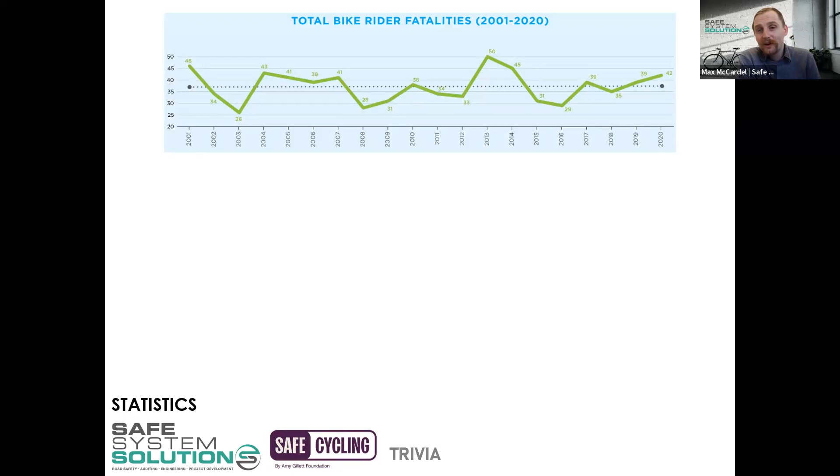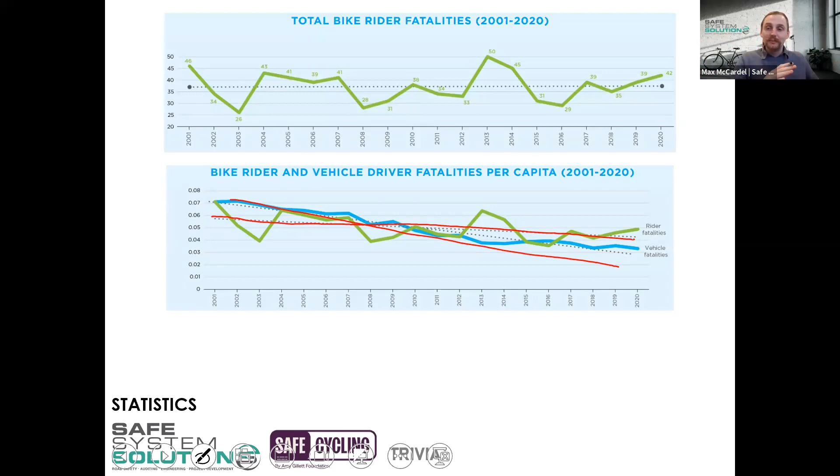If we compare that to vehicle fatalities, the trauma occurring there has been reducing over the years. The second graph is fatalities per capita, taking into account not just the number of deaths but how that relates to the population, or per head. Vehicle fatalities is that blue line, and we can see a downward gradient there. Cyclist fatalities also has a downward gradient, but it's not quite as steep. That's indicative that we're seeing wonderful improvements in road safety performance relating to general traffic or vehicles, but our cycling population is not seeing that same level of benefit. There still seems to be an issue with cyclists being killed on the road network, and it doesn't seem to be decreasing at the same rate as we're seeing with general traffic.

Now, when we look at the actual gender split for that, unsurprisingly it is men being the bulk of those killed on the network. I'd say unsurprisingly in that men are generally more commonly riding, and also more commonly riding in those higher risk environments, which could be higher speed roads or busy interchanges and things like that. So that's just a little takeaway there as well.

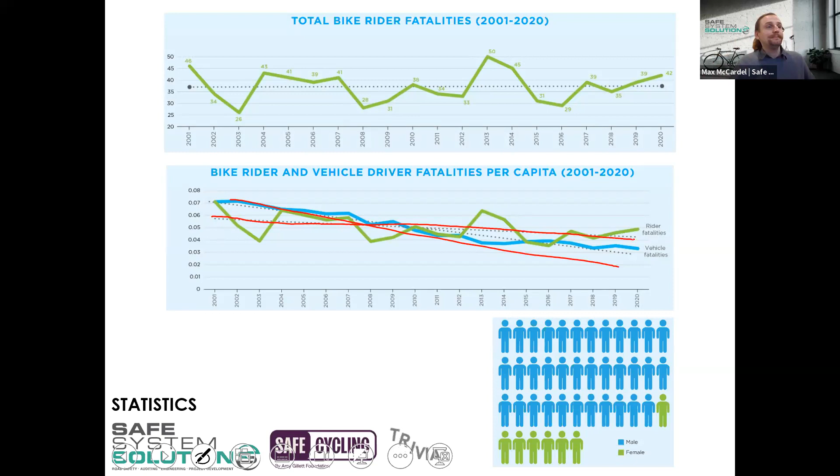Today's module topic will be all about roundabouts. Now, we could have included roundabouts within the intersection module because a roundabout is an intersection configuration, but it's deliberately been separated here because they are generally quite a significant pain point for cyclists. It's another one of those areas where traditionally we've done very poor work in designing for safe cycling facilities within or adjacent to roundabouts.

There's definitely a strong case for roundabouts' ability to improve safety for general traffic. For those in vehicles, roundabouts are a wonderful thing, they have excellent safety features. It's the way you've configured the roundabout with the angles - if you were to crash within the roundabout, they tend to be more of that angle where you've got an ability to glance or collide with each other rather than a perpendicular or T-bone type of crash. So that's for general traffic. However, those same benefits are not echoed for vulnerable road users, pedestrians and cyclists. In fact, cyclists and pedestrians tend to fare worse at roundabouts compared to a signalized intersection. So just something to keep in mind there - that's why we focus so much on it in today's module.

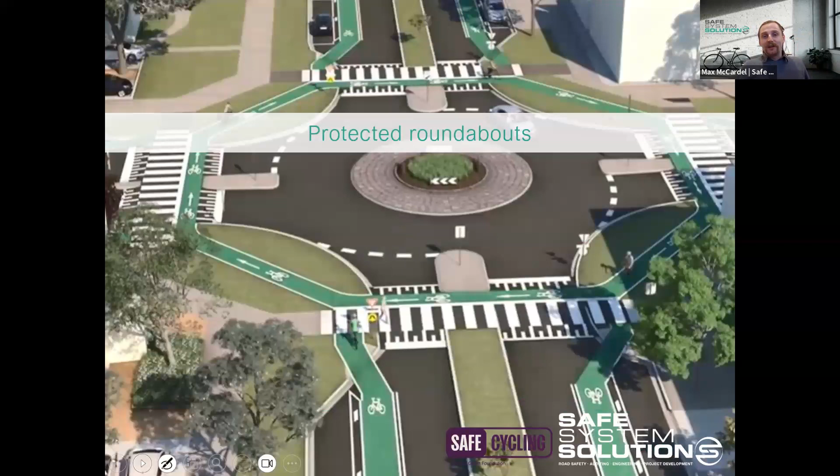So a protected roundabout, this is an artistic rendition of Melbourne's protected roundabout. It looks something like this. There are a few different configurations, which we'll go through with our international examples, but the main thing you want to achieve within protected roundabouts is a cyclist having the ability to use an off-road or protected feature away from the circulating area.

This inside ring is where general traffic obviously travels. Cyclists are not being encouraged to use that. Instead, they are directed to use an off-road or protected facility that runs adjacent to that inner ring.

Now, this leads in very well to our next slide, where we've got three cyclists within a roundabout here: cyclist A, cyclist B, and cyclist C. We're going to launch a poll now, which will ask which cyclist you believe is most at risk. So you've got cyclist A, B, or C. I'll give you 30 seconds to have a go at answering that poll.

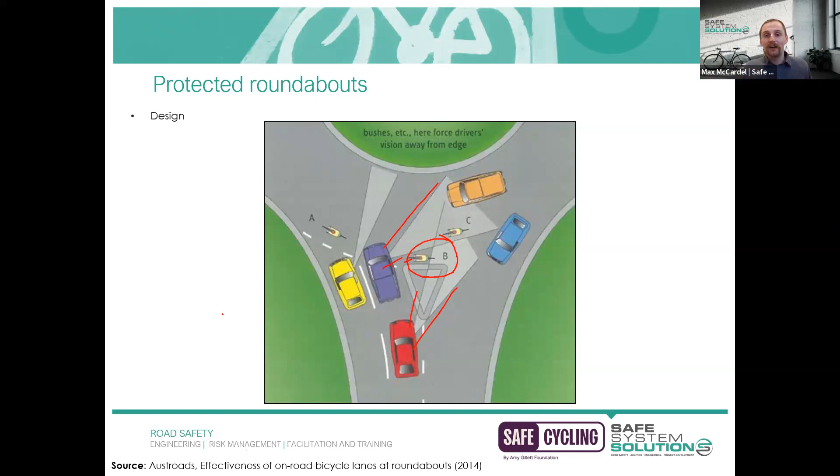Cyclist B is in a really precarious scenario here. The lines we're seeing are the driver's sight lines, or where they're focused. You can see the red car as well as that purple car. Cyclist B is just not within that zone of priority for the motorist, who is really looking out for the big metal cage with the engine. That's just how we've been trained to look for things. There's lots of psychology supporting that we're just trained to look for cars, not really for cyclists or even motorcyclists. Being in that position, cyclist B is definitely in quite a grave scenario, because it looks like the purple vehicle has already started to enter the roundabout, so there is going to perhaps be a collision there.

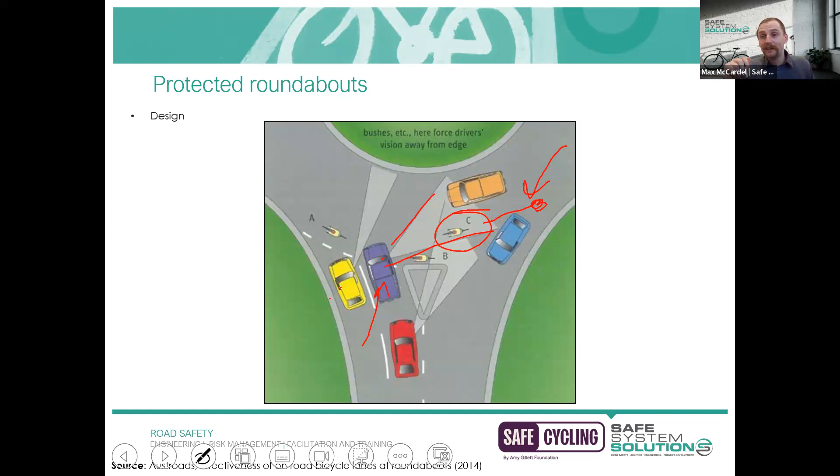Cyclist C, there are a few reasons why this area is of concern. When cyclist C was back at this point, the exiting vehicle would have resulted in a collision there. Similarly, the purple vehicle is able to see C, but the yellow vehicle cannot see C because of that. The term I used on Wednesday is dynamic visual obstruction, or masking — basically the purple vehicle blocks the sight lines for the yellow vehicle. So the purple vehicle may, at the last minute, slam on the brakes and stop to let the cyclist pass, but the yellow vehicle may not, and enters the roundabout, resulting in another collision there.

So I do think the answer is that all of those result in quite significant risk for cyclists, and this ties in nicely with our next slide, which is where we're seeing trauma occurring for cyclists at roundabouts.

So this was done a few years ago now, nearly 10 years ago, but Austroads commissioned this study into all the different crashes that have occurred within roundabouts, reviewing the police reports to determine exactly what were the movements of both the cyclists and the vehicle.

Overwhelmingly, at 68%, it's a vehicle entering the roundabout versus a cyclist that is already in the roundabout. The green dotted line is the cyclist, and the red solid line is the vehicle. This is the classic example of looking but failing to see, or looking just for cars, seeing a gap in the cars and not noticing or processing that there could be a cyclist there as well. So 68% of crashes are that type, with a vehicle failing to give way and entering the roundabout where there's already a cyclist there.

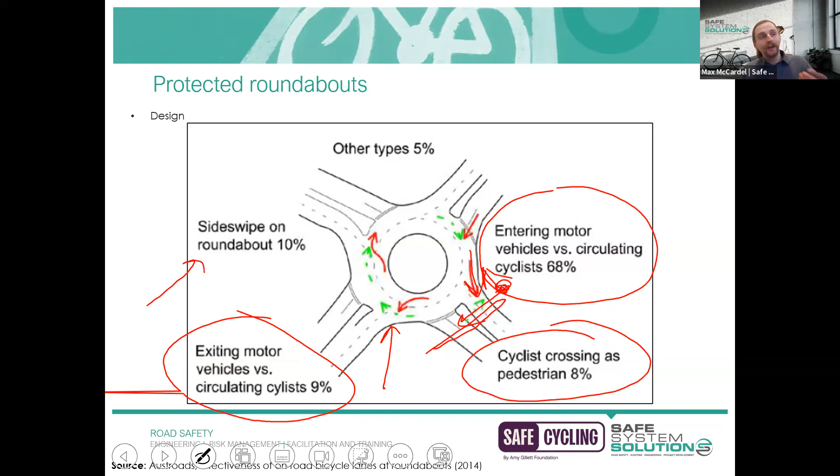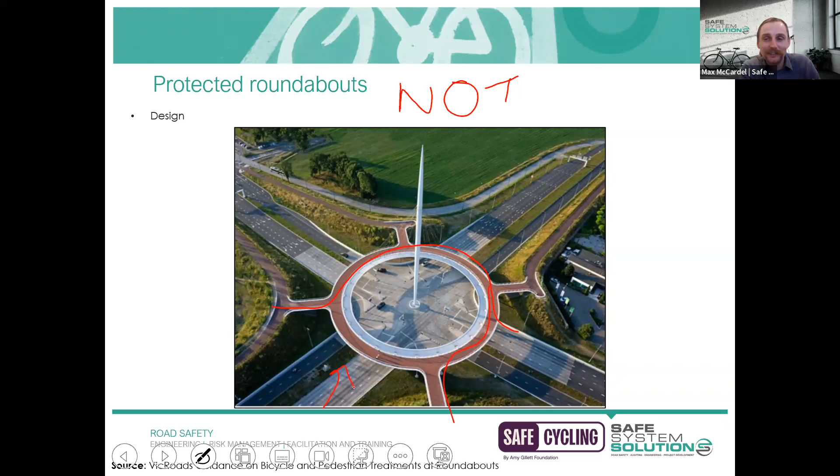Now we will talk about protected roundabouts in today's discussion. This is not an example of a protected roundabout - some people think this is what protected means, but this is a wonderful example of grade separation. This is the Hovenring in the Netherlands, and as you can see it basically completely separates cyclists and pedestrians from the busy motorway below, so they don't have to deal with any of that traffic - they've got their own separate facility. If you've got the ability to do this, by all means do it, but a protected roundabout looks a little bit different. I just wanted to show the Hovenring because I think it's really cool.

So similar to our intersections, we will talk about the design configurations. Once again this has been adopted from a North American research authority, so different terminology, and it's also been flipped just for this training session. But as I mentioned, what we want to be doing is providing our cyclist facilities away from the circulating area. We don't want to be recommending that cyclists use the same travel path as motorists, because as we just discussed with those crash types, motorists may fail to give way to cyclists in there.

Motorists may exit their leg and then conflict with a cyclist in the roundabout. Motorists may veer from their traffic lane, resulting in a collision with cyclists. So if we can avoid that situation altogether and provide off-road or protected cyclist facilities away from that circulating area, we'll see the safety benefits associated with that.

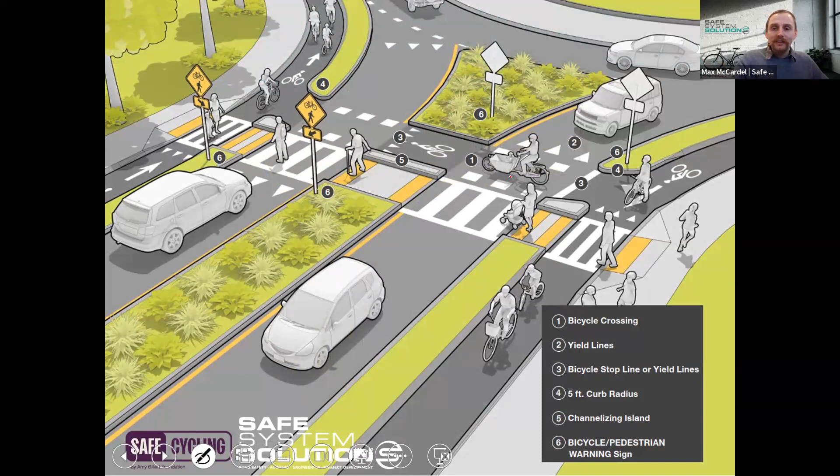Now I'll go to the next one because it's got all the design features, a bit easier to talk to. Number one here is the bicycle crossing point, where the cyclists are crossing over. So you can see there's a bicycle lane there.

Number two is the yield lines, so we would call that give way line marking or something like that. Basically, the locations where it is clear for motorists that they have to slow down and give way to pedestrians and cyclists crossing within that space - they are not awarded priority.

Now this is a very confusing part of this diagram, which says bicycle stop line or yield lines. I'm just going to cross that out because you wouldn't have both the cyclist and the motorist yielding - you would pick one or the other. So generally we recommend making the motorist slow down, give way to our vulnerable road users, and don't worry about number 3 at all because it's just overly confusing. I'd say that's not for our jurisdictions. Over in North America they do that, and also in Europe, where you've got the yield lines for both - I think it's very strange.

Number 4, once again not a significant issue, is just the curb radius - ensuring that things aren't too tight for cyclists to turn and interrupting their journey.

Number 5, I wouldn't say is a critical feature either, but it's suggesting that you've got something that separates the pedestrian facility from the cycling facility - channelizing islands or a curb system or something like that. I think it offers some degree of delineation, but it could also present a tripping hazard for pedestrians crossing there, or errant cyclists as well. So I don't see that as a critical feature.

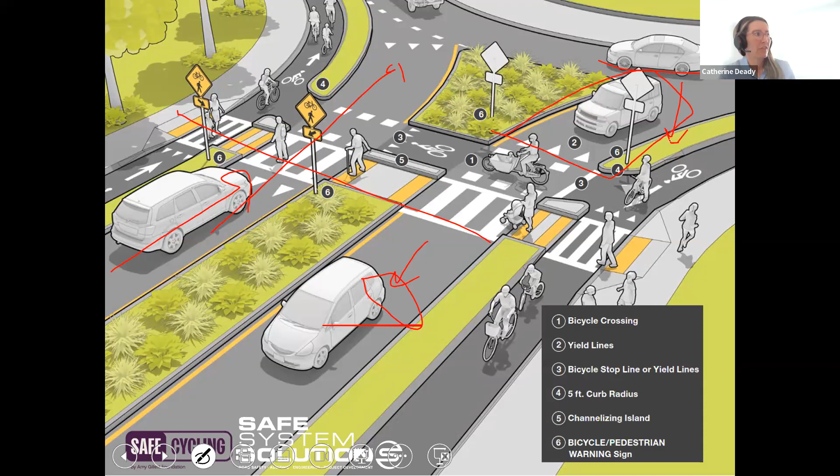Thank you, just one more question. If the distance from the roundabout to the bike pedestrian crossing point is small, what if an exiting car suddenly has to stop and cars following suddenly stop, blocking the circulating roundabout? Wouldn't there be increased risk of rear end collisions?

Yes, that could happen, and you may have an increase in rear end or sideswipe type crashes within the roundabout. But it's a much better outcome because people generally walk away from those types of collisions. It's an annoying thing, and it goes to insurance companies and mechanics, but generally those rear end sideswipe crashes are completely survivable.

If we compare that to the other option of getting cyclists riding within the circulating area, because that's deemed too much of an annoyance, a collision between a cyclist and a vehicle in the circulating area - 90% of the time that is going to be a serious injury resulting in hospitalization or fatality. So looking at the severity of the different crash outcomes, I'd still go for this as the preferred design.

Thanks, that's all from me, Max. Thank you. Max, what about trucks and buses?

This first example is where we actually have quite reasonable land availability. This is in Assen, in the Netherlands, and I have flipped this image as well.

A vehicle within this space, say turning right, traveling from here - that's their movement. A cyclist who wanted to turn right has a couple of options: they can go from the same direction like this, and since it's also a bi-directional facility, they could also go like this. All I wanted to show is there's no interaction with cyclists in the circulating area - they've got their own path, completely separated, and don't really conflict within that circulating area at all.

Where cyclists are crossing, they're at distinct locations - crossing the legs where I'm circling. At all of those locations, they have the right of way, so vehicles are slowing down and yielding to them, giving them priority.

As you can see, this is quite a large footprint. In this example, there's about two car lengths between the edge of the circulating area and where the crossing point is - so that'd be 12, 15 meters or so, which is a fairly large footprint.

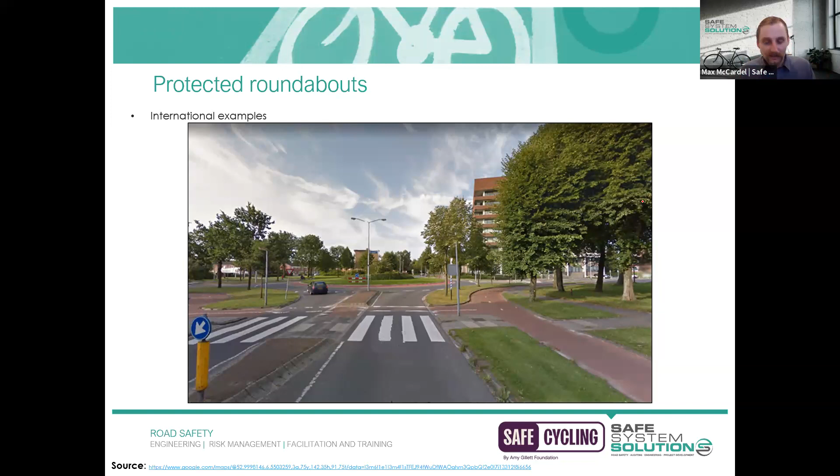I'll also go back to one slide - something else I wanted to quickly mention - if you were a cyclist crossing over this leg here and a vehicle was coming the other way and exiting, once again what I was talking about in the previous module, that conflict point is very, very close to perpendicular, meaning cyclists are crossing in front of that exiting vehicle, which is a very big tick.

In the circulating area, if cyclists were riding here, that conflict angle is incredibly acute, which is really why you're providing these protected facilities - to open up the sight lines, make it as clear as possible where the conflict points are, and ensure that motorists are able to see cyclists crossing there.

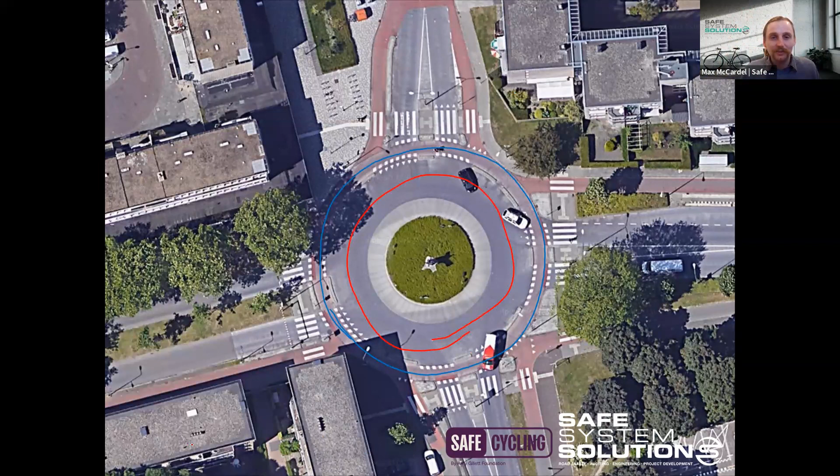This next example is one where we have a much smaller footprint. You can see the circulating area here for motorists, and directly adjacent on the periphery is a nice circular bicycle lane - just two concentric circles being used there. This one is in Rotterdam, still in the Netherlands. This has been designed to work within the existing footprint - you can see the edge of the buildings is very close to the roadway, so obviously land is quite tight in this scenario.

The benefit associated with this is for cyclists traveling - they've got less distance to ride. If they wanted to go left, through, or right, there's less of having to go down 12 meters and then back to the right 12 meters just to go straight. It's a much more reduced kind of connection there.

The disbenefit with this is that conflict angle I was talking about before. Very conveniently in this snap that I happen to have, you can see this white vehicle exiting, and you can see a cyclist riding there as well. If that cyclist was perhaps a bit close or riding at speed, you can appreciate that exiting motorist would have a very hard time seeing that cyclist. We really want to make those conflict points as obvious as possible.

I'll show how that looks from the ground, which once again I have another wonderful cyclist here providing this demonstration. I might bring in a little Porsche driver here just to help with my figure - nothing against Porsche drivers. But if you put yourself in the perspective of that vehicle trying to exit this leg, your ability to see this cyclist as they're coming around and potentially crossing over you is quite limited.

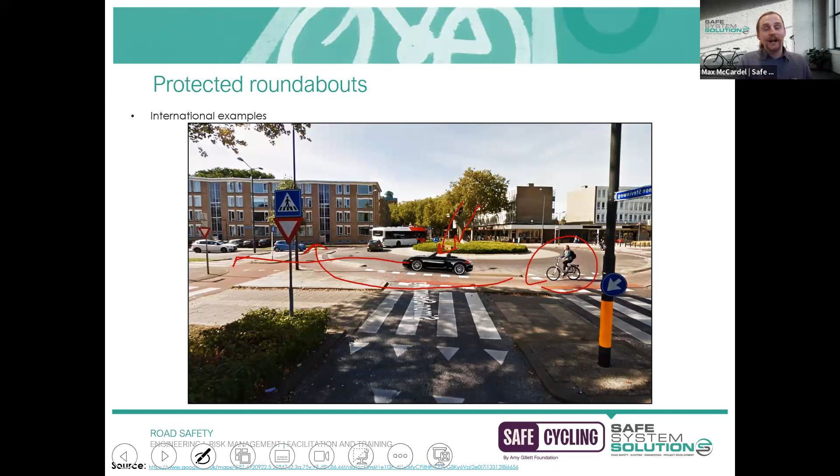Similarly, if you were the cyclist, you may not necessarily have good sight lines of what their turning movement is going to be - you may not see whether their blinker is on, which can create confusion. Now, I'm not saying you always have to have the big footprint to do protected roundabouts, and this isn't terrible - I'm just saying it's a bit of a spectrum with protected roundabouts. The closer you bring the bicycle crossing facility to the circulating area, the more that this sightline risk becomes apparent. So just something to be mindful of.

Another international example, this one is in Cambridge in the United Kingdom on Fendon Road, for anyone interested. It opened in July 2020. It's kind of an amalgamation between the first example we looked at and the second one, where we've got a little bit more space to play with.

This is, I guess, what you would call the yardstick, or what you'd be aiming for within designs. It's basically enough room for an exiting vehicle to be able to stop, yield, and give way without blocking the circulating area.

The sight lines for this one are improved compared to the last one. Not as good as that perfectly perpendicular one that we saw in the first example, but they are improved there. The other thing that is quite good is, once again, having just this one smooth curve radius for cyclists. Cyclists tend to prefer that, as opposed to having parts that connect at weird angles - it's just more comfortable to ride with one nice smooth radius there.

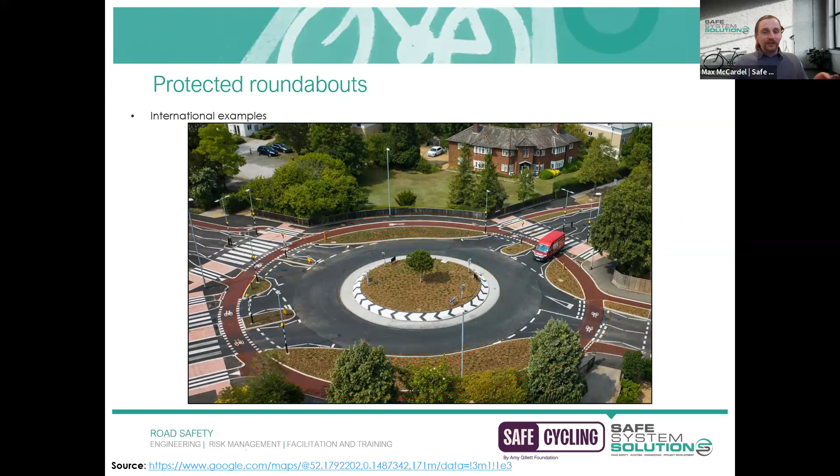Hopefully that gives you a bit of appreciation of the different ways that these protected roundabouts can look. Let's have a look at this one on the ground here. This illustrates the point I've been talking about, where you can see that the motorist has quite excellent sight lines of the cyclists crossing in front of them. In the other scenario, the cyclist would have been right up against them, which is a bit more of a precarious situation.

I'm going to just play a video now of a real protected roundabout that has been installed, which will show you the operation of things. Whilst this is playing, I will check in with my colleagues to see if there's any questions.

Nothing from me, Max. Hello. There was a very good observation from an earlier example that you had, Max, where there was zebra markings on all legs apart from one leg of the roundabout.

Really? Do you know why that may be? I can't say, I'm intrigued. I didn't even notice that. I know, it was a fantastic observation. Yeah, that's a great point. Let's give a prize out there for that wonderful vision. I'll go back to that video - I swear, this leg does not have the zebra crossing.

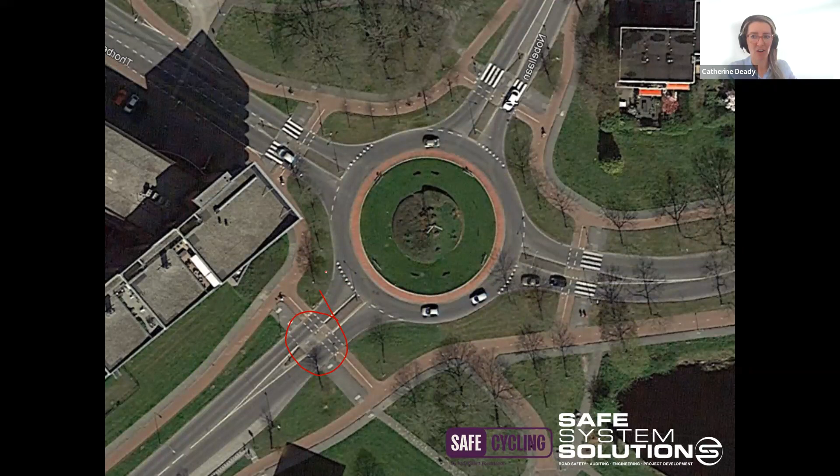My assumption was maybe it's because the authority doesn't want pedestrians to cross at that location, or for it to be a priority for pedestrians for some reason. I'm not sure, but if the person that noticed it is anonymous, please send us a private message so you can get your prize. How peculiar, I can't believe I've never noticed that as well. That's excellent, well done. I'll go back to that video now, we can keep watching that.

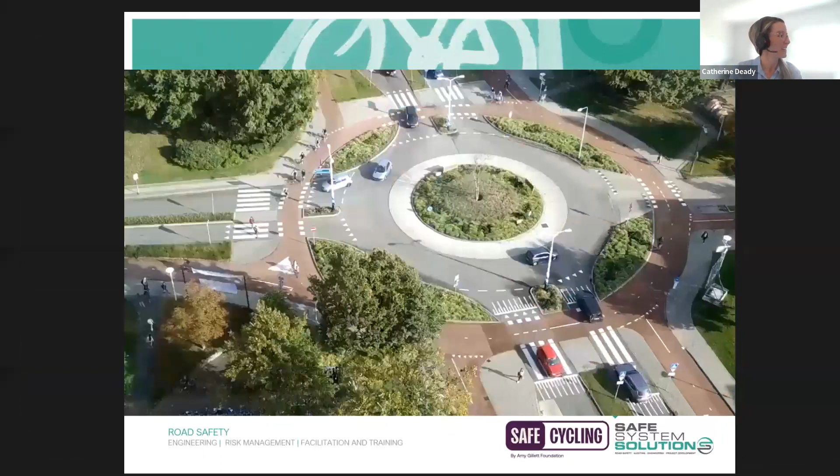Just a question about the examples you've been showing - is it a problem that vehicles stopped to wait for pedestrians to cross are blocking the cycleway? So the way this tends to work in practice, and perhaps this video will show it well, is that actually you might see it.

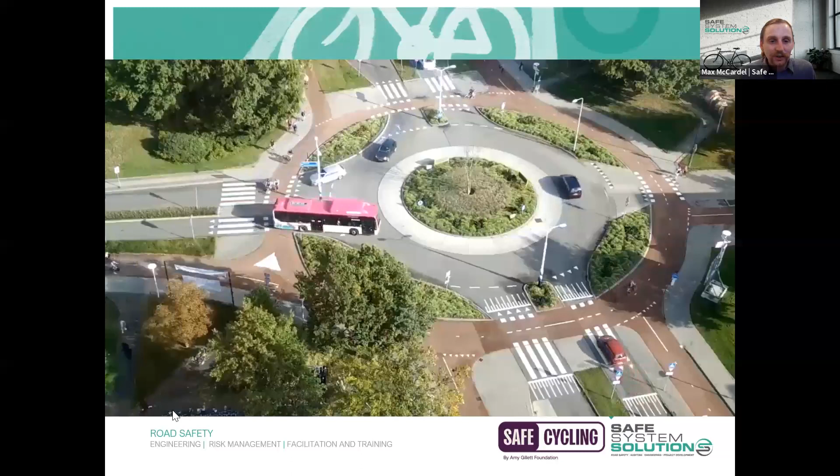Let's see if I can draw it quickly. See the pedestrian crossing - see that motorist was waiting there even while the pedestrians are crossing. So they tend to wait adjacent to the cyclist path and just treat that all as needing to give space, a gap for both cyclists and pedestrians. So the way in practice these things tend to work is it would occur that a motorist would block the cycle lane, but it's not a frequent occurrence, I wouldn't suggest.

It's a fantastic vision, isn't it, seeing it in action. Yeah, and this one is actually peculiar because the bottom leg is raised. You can tell by those piano key line markings - that's a raised crossing point, but the other ones don't look to be. So I'm not sure behind the reasoning for that either.

That's a good pickup. But you can see lots of pedestrians, lots of cyclists riding through here, and general traffic just doing their thing as well. It is a cycling corridor, and that's why this is being prioritized. I think this hopefully gives you a bit of confidence that these things can work. They look a little bit unusual, or we may not be used to seeing this, but generally you can implement these things, and both modes of transport can coexist.

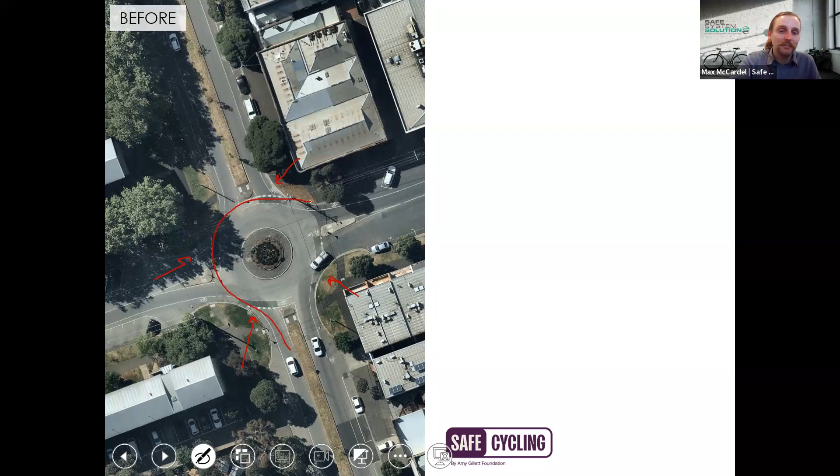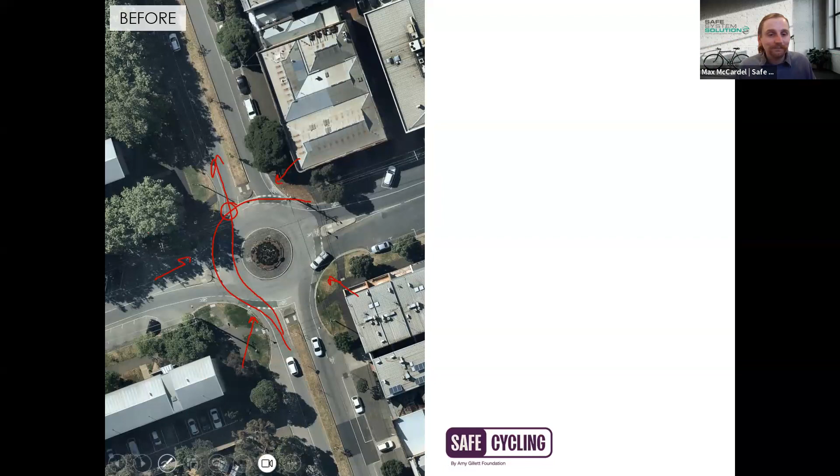This example here is an aerial image of how things used to look. You can see bicycle lanes on the periphery of the roundabout. As I mentioned before, riding on the periphery is incredibly stressful. If you're riding there and turning right while a motorist is behind you wanting to go through, you've got this awkward moment hoping they acknowledge you're turning right. You should be signaling, but you hope they've picked up on that cue. That was the arrangement prior - on-road bicycle lanes within the circulating area, quite an uncomfortable experience for cyclists.

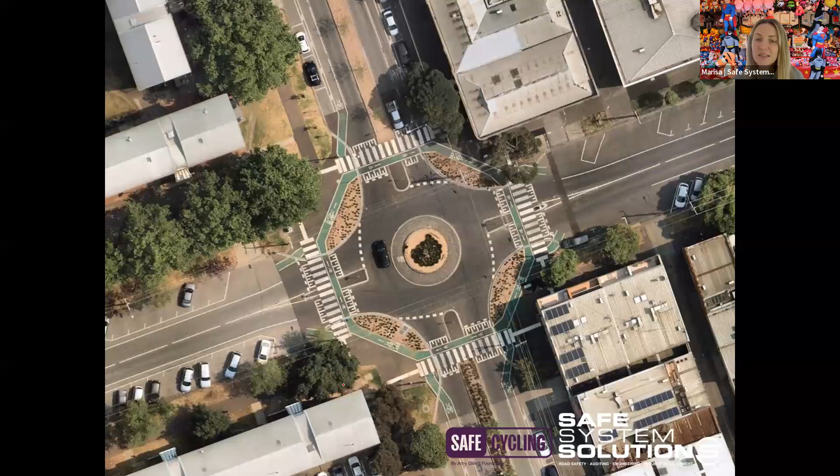Oh, how does it work with the left and right hand side cyclist lane ending suddenly? Poorly, I think it's strange. I think that's referencing these points here, where the cycling facility ends and goes straight into that angled parking we were talking about. Ideally you'd have networks that are completely connected. Even on this side, you can see it's adjacent to a dooring zone with a bit of a painted buffer. On the other side, or it could be another section, there are protected lanes. There's a little bit of everything going on in this corridor, so it's very inconsistent in terms of the different treatments. But I just wanted to focus on this actual intersection or roundabout.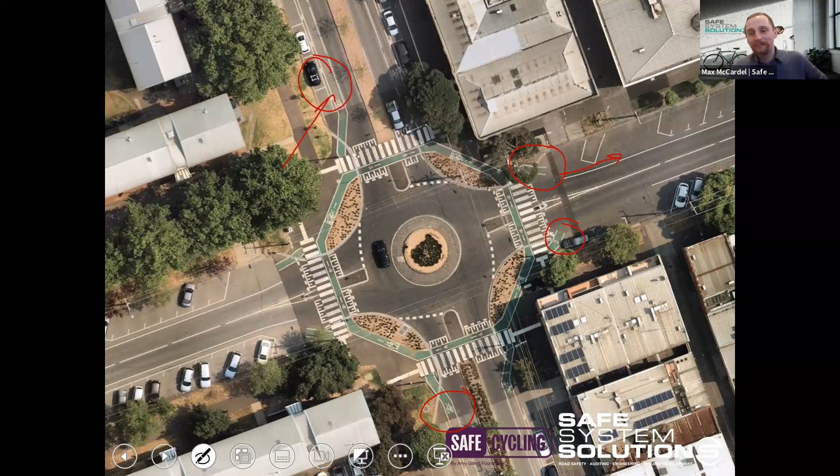Good pickup though. Yeah, really good pickup.

Just a question on analysis - has there been a project evaluation on the protected roundabout here, Max, for all road users? There has been, and in fact we did the evaluation on this, so I can give you some info. We did a study before this got implemented and then post-construction to show how things have changed for all road users. I'll go through some of those figures in the next couple of slides. Great, thanks Max, no worries.

I can see lots of comments going through about the disadvantages for cyclists. Yes, I think at times the raised pavement, particularly where you're tying in with the drainage, can sometimes create issues with debris, or the different ramp grades can be uncomfortable for a cyclist. But the response I was looking for is that cyclists do have to ride further to do their turning movements, in particular the right turn movement.

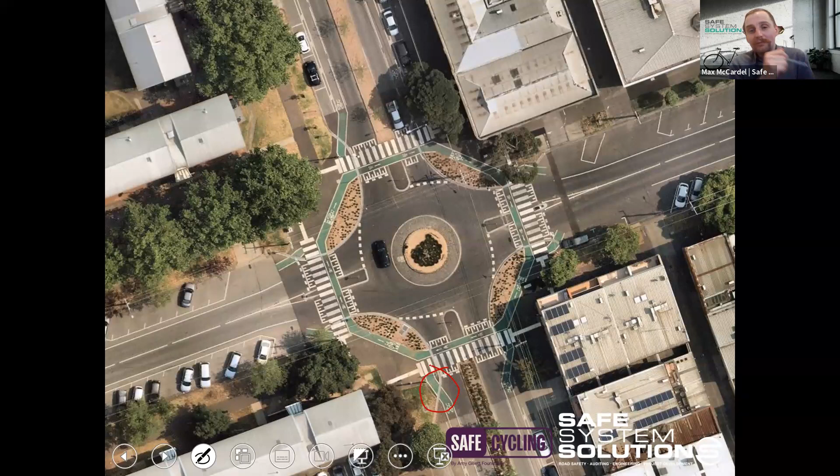If I was looking at a cyclist coming from the bottom using the protected facility, they do have priority at each of these legs, so they don't have to slow down for vehicles and give way, but they do have to travel further than if they were to just use the circulating area. On an aerial, that extra distance seems negligible, but as a cyclist, I know the cycling community will always choose the quickest and most convenient route, which means we do have cyclists using the circulating area, like this person here.

We did an evaluation on how effective the protected roundabout has been for cyclists adopting that protected facility. In terms of cyclists wanting to travel through this roundabout, around 91% are using the protected feature.

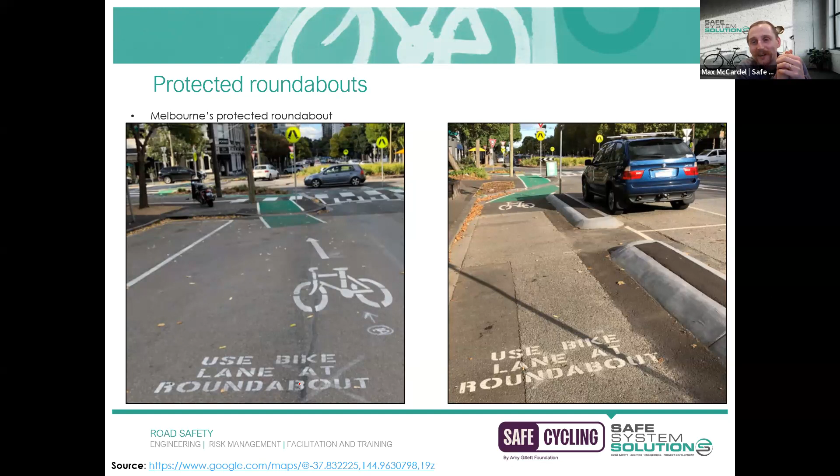Yeah, that's it. That's all from me.

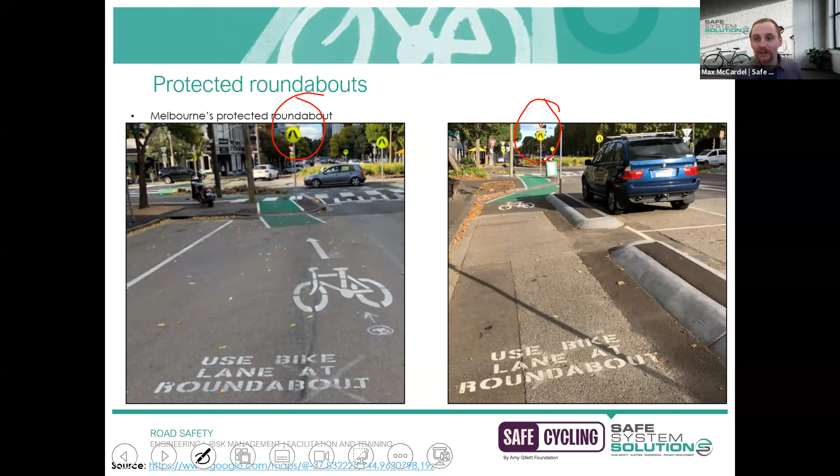Thanks, Max. In terms of the other legality, all of those give way and pedestrian crossing signs are regulatory signs, so they require vehicles to yield. And if they did not, they could be enforced.

We're going to move away now from our protected roundabouts and talk about multi-lane roundabouts. These are significantly risky areas for cyclists. This example shown here is a rural environment, high speed, from memory 80 kilometers per hour. The east-west is a major highway, and the north-south is a lesser local road, a collector road.

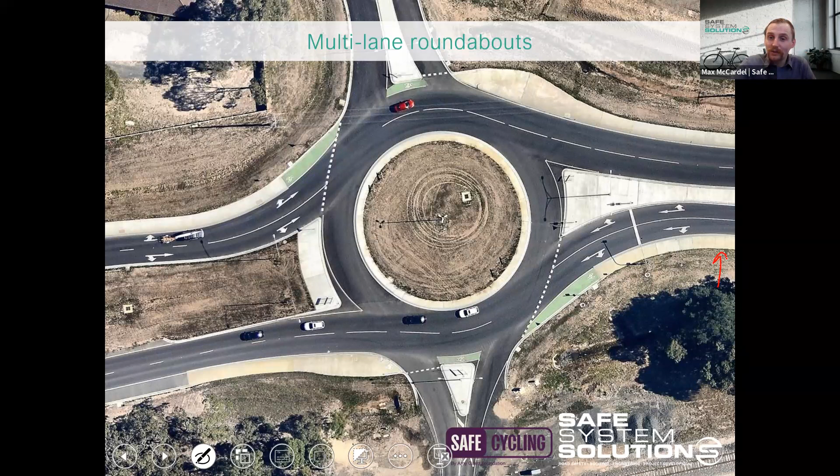On this right leg, you can see things start off quite well. We've got a separated bicycle facility, so cyclists are traveling off the carriageway, which is excellent. As they approach the roundabout, the bicycle lane width tapers, getting narrower, which is very uncomfortable. The reason is to account for swept paths of the through traffic lane, only thinking of general traffic and not the cyclist. A cyclist in this lane has a little green bicycle lane installed adjacent to the splitter island.

If a cyclist was traveling straight, they'd just access that area and continue. However, a cyclist turning right doesn't have many options. They could potentially pause here - there's no curb ramps or anything - and do quite an uncomfortable turn, looking to pick a gap in traffic and filter across to this section, then once again pick a gap and continue. It's not a realistic journey; it's unlikely cyclists would do that. For those who don't feel comfortable, that's an option, but since there's no actual curb ramps, it's pretty unlikely to be a common way cyclists use this.

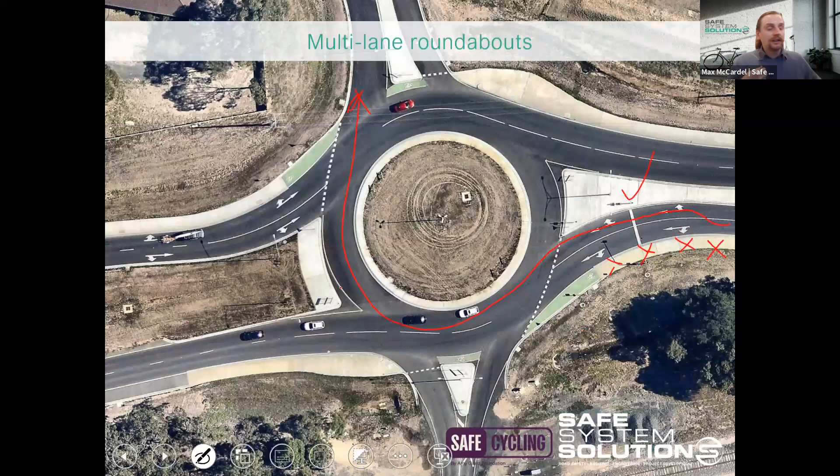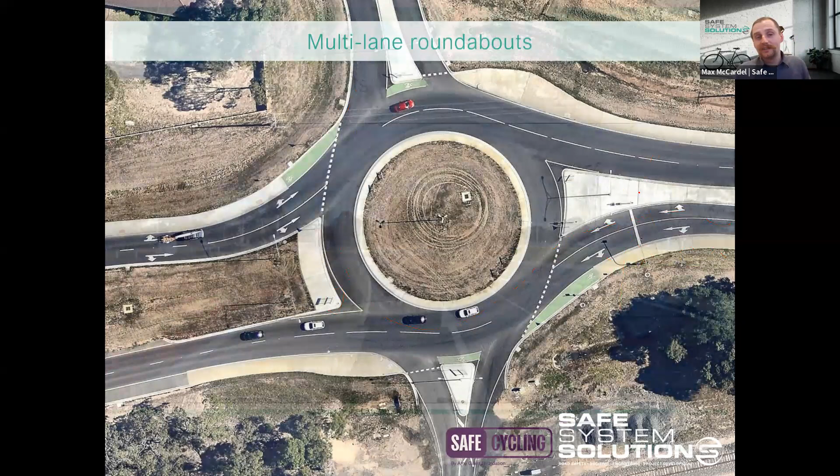You might have noticed this little traffic signal thing, and for those with really good eyes, a hold line or stop bar there. Unfortunately, that's got nothing to do with cyclist facilities at all. That's just there because there's an adjacent rail line, and if the boom gates are down, a red left arrow goes on so motorists don't queue over the circulating area and block that facility. Nothing to do with cyclists, unfortunately.

So these multi-lane roundabouts are significant safety concerns for cyclists, and they ought to be treated as such, as very high risk scenarios for cyclists, particularly if you've got cyclists turning right.

Another example shows a very similar roundabout in terms of configuration. However, the way the cyclist connection has been treated is different, so I wanted to focus on this one. This is in Canberra in the ACT. Just focusing on the right-hand side again, we've got a bicycle facility on road, and they get directed to an off-road facility.

This off-road path moves cyclists away from the circulating area. There's a hold rail, which is those little U rails, where cyclists can prop and wait and give way to any vehicles, pick a gap before crossing over. And if they were to do a right turn, once again there's a hold rail there and curb ramps to help facilitate these types of movements.

100%, this is much more circuitous, or it takes a lot longer for a cyclist to do this kind of movement. But in these scenarios, you've got high volumes of traffic, high speeds, and so you just can't be trying to commingle cyclists within that space. It's not going to work.

In an ideal world, we'd be able to grade separate everything and we wouldn't need to worry about conflict points at all. But we are pragmatic, and instead what we can do is assign the priority to general traffic, because if a motorist sees a give way for pedestrians and cyclists at roundabouts that look like this, they're not giving way. It's incredibly unlikely they'll give way.

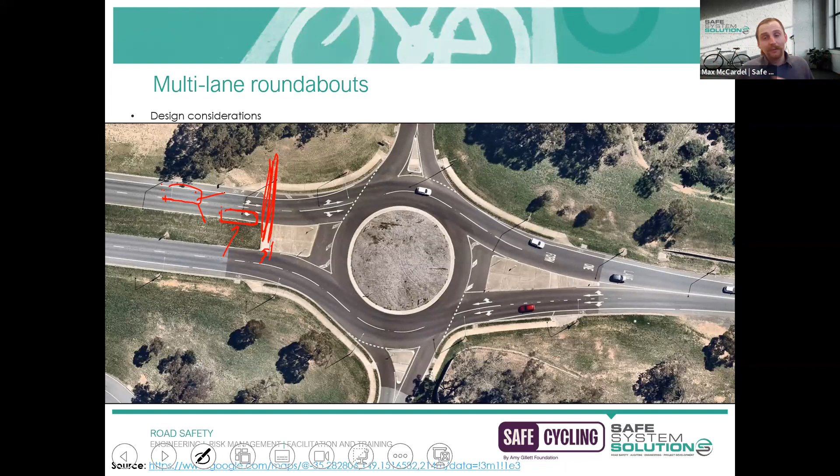Here's how it looks on the ground in wonderful Canberra. As you can see, cyclists are being corralled into that position there. It's not fenced off, so cyclists could still cross over here to get into the right lane and do that movement if that's what they wanted. But it does provide that for those that don't feel comfortable, that there is a crossing point that's provided. You will have to give way. You will have to wait until you've got a gap in traffic and then cross over.

Now, as I said, it'd be wonderful to have all these things as just connected facilities for cyclists, but I am trying to be pragmatic in this space and acknowledge that where you are crossing motorways or high movement function corridors, you're pretty limited to be able to slow down vehicles in those spaces.

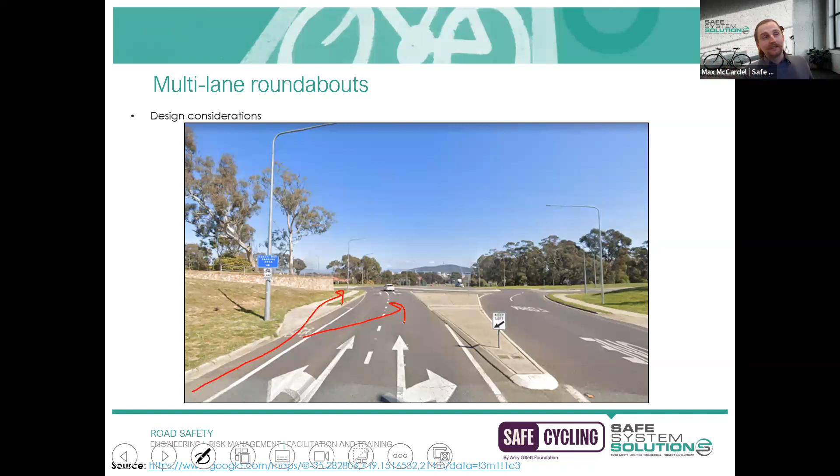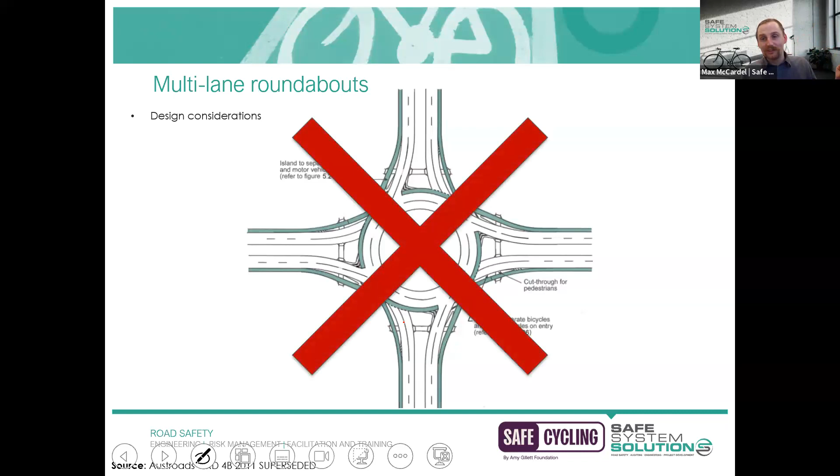Now, the other diagram I wanted to mention with multi-lane roundabouts is this one that was out of the Austroads guide previously. If you've got any printed versions of your Austroads documents, make sure you put a big cross through this one because this has been superseded. We are no longer recommending having bicycle lanes actually demarcated within the circulating area on multi-lane roundabouts.

So you can see this multi-lane roundabout has the bicycle lane right on that periphery. That's no longer being recommended, and that's taken out of guidance altogether. So if you've got any of those documents, make sure you supersede those, and instead what we want to have is cyclists crossing at distinct points and acknowledging that the priority may not be awarded to them.

Speaking of that movement function, I actually quite enjoy this as a concept design, which I do not know this area. This to me is just a bunch of lines on paper, but the way I immediately interpret this is I can see that the east-west leg is multi-lane, so I'm going to assume it's a high movement function. For those that have done any movement and place type of training, this would be like the M1, where it's really important for getting goods and services through here, getting all those transport trucks and things like that. This would be your general traffic corridor. That's just my limited understanding of what I'm looking at here.

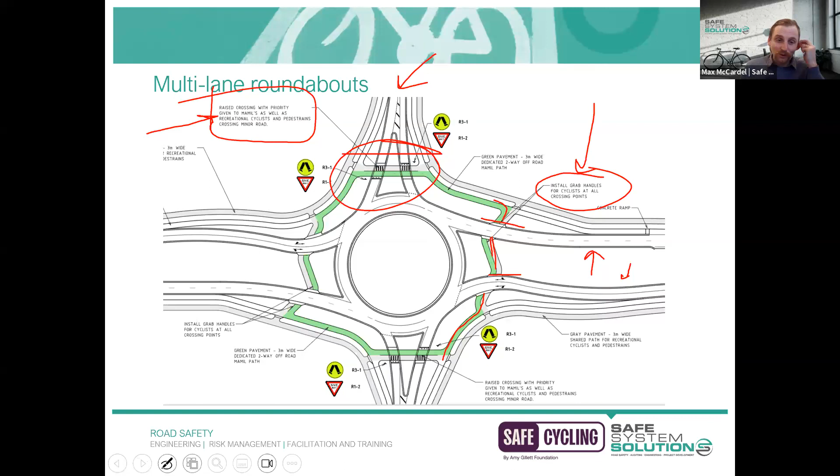I think they're a high risk. As I mentioned before, if you've ever got two lanes adjacent each other, you've got that masking risk. And so invariably you will have a moment in time where it could be possible that pedestrians or cyclists crossing are completely blocked by another vehicle.

In saying that, does that mean you just don't do any facilities and you're not encouraging any activity at all? I don't think that's a good outcome either, because if there's a demand there for pedestrian cycling activity, then presumably there's surrounding land use that is generating that attraction.

Perhaps it's bigger than that, and it goes back to our strategic planning of where we are actually putting things that are important to our community. If it's adjacent a multi-lane roundabout, that's probably not where I'd be prioritizing things like schools or shopping centers, because we don't want lots of pedestrians crossing in these scenarios.

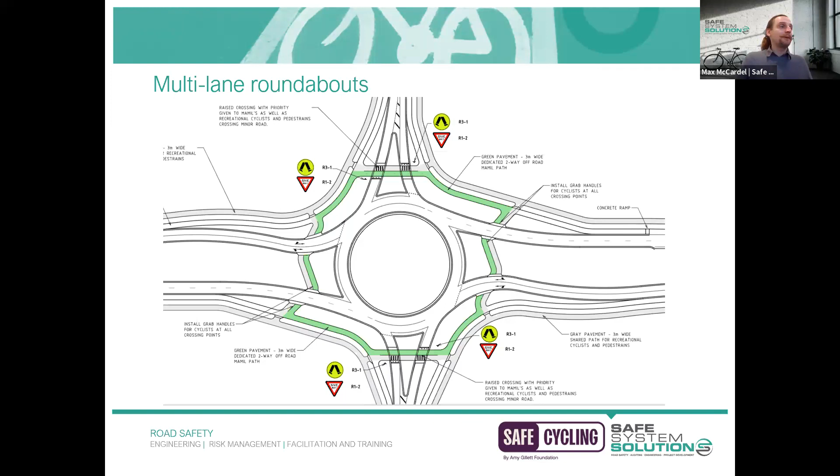Yeah, certainly. That's all, Max. Thank you. You're very welcome. Keep the questions coming and I'll keep getting through the content.

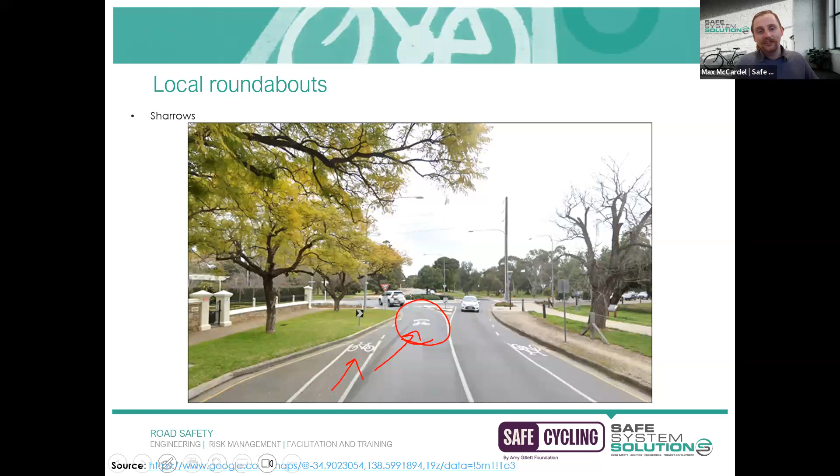But what they're doing here, as you can see in this example, the bicycle lane is similarly ending, and there is this sharrow centered right in the middle of the traffic lane. So it gives cyclists a bit of confidence that they are able to shift across, and rather than ride adjacent the curb and channel, they can ride in the middle of the traffic lane. Similarly, it gives motorists an indication that cyclists are expected to be riding in the traffic lane.

We've already gone through the exact definition of sharrows. The way I actually recommend them and like to see them installed is giving motorists prior knowledge that this conflict is going to occur, using supporting treatments like local area traffic management treatments or traffic calming, so that we're actually slowing the vehicles down.

So in this example, we've got an asphalt speed cushion that's been implemented, so vehicles will be slowing down for that. In a perfect world, what you'd love to see is this treatment occurring before that merge point occurs.

So you'd have vehicles that are slowed down prior to where that conflict point exists with cyclists. The other thing that is also encouraged if you're doing sharrows within roundabouts is the use of sharrow markings within the circulating area. You can't see them in this photo because there are none.

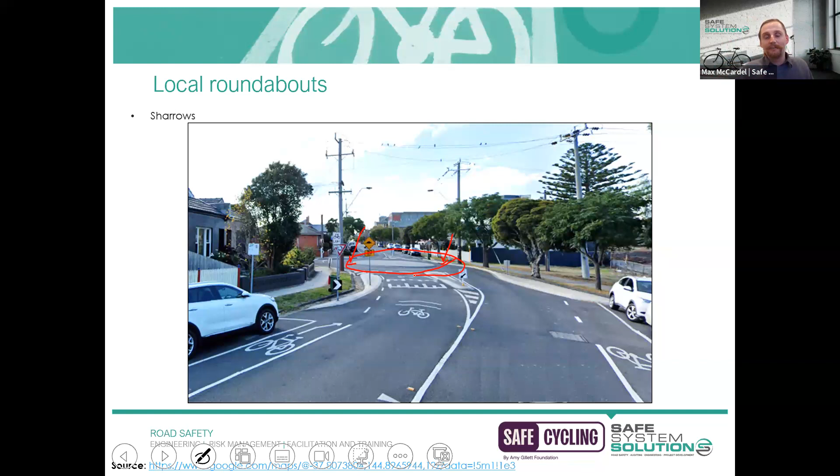It's once again another reminder that cyclists don't have to ride in the periphery of the roundabout. Instead, you want them to be taking a more central, focused location, right in the middle of the area. So providing the sharrows in the circulating area in the middle of the traffic lane is also an important thing to consider.

Just another example of this being used. It's a fairly common way to address cycling safety at roundabouts - just to use sharrows and slow down general traffic through the use of speed humps and things like that.

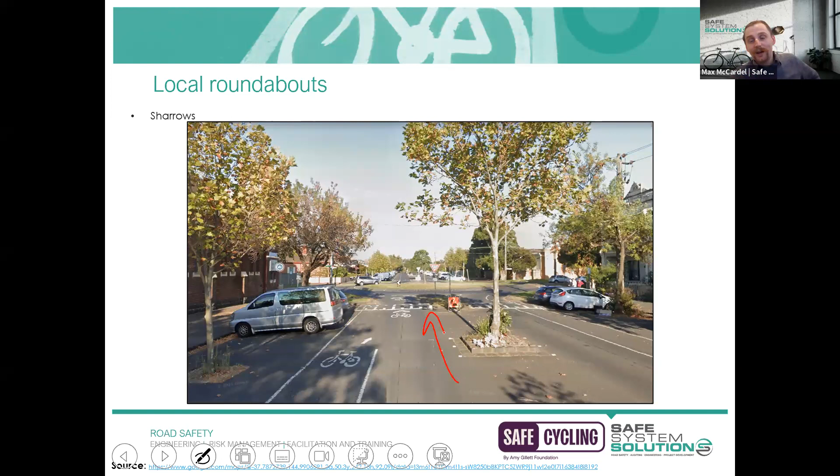The remainder of today's session, I'm going to go through a few education campaigns, moving a little bit away from our cycling infrastructure. And then I'm going to go through the final assignment that you are required to complete to obtain your certificate. You're welcome to continue asking any questions, but just wanted to give you a heads up of what we've still got to go.

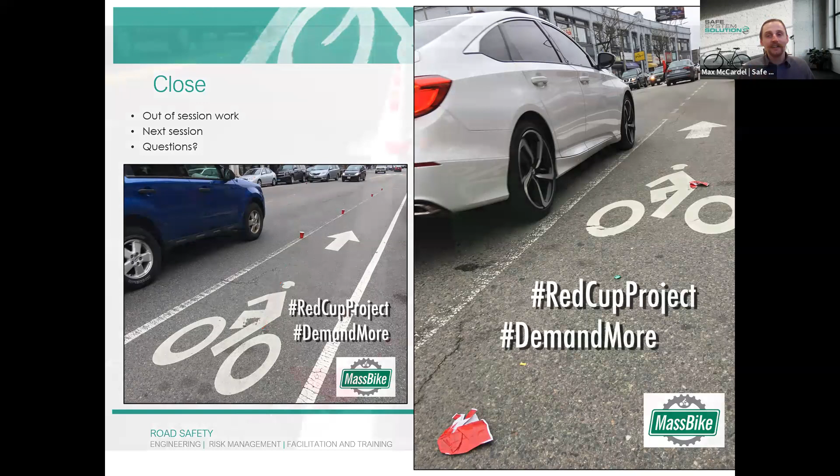A few years ago, you may have seen this trending on Twitter - the Red Cup project. Basically, communities around the world put these little red cups on the edge of their bicycle lane, and then took a photo later in the day to show how well those red cups fared, and invariably they were crushed quite quickly. That was a real community-led campaign and it did go quite viral, with examples out of the States, Canada, Australia, Asia, Europe. It just went all around the world with this idea of look how quickly vehicles are encroaching into the bicycle lane and how vulnerable we are, and that just applying line marking is not enough to protect us. Lots of these examples also included things like using tomatoes to add to that drama. But yeah, quite a useful little thing to know of.

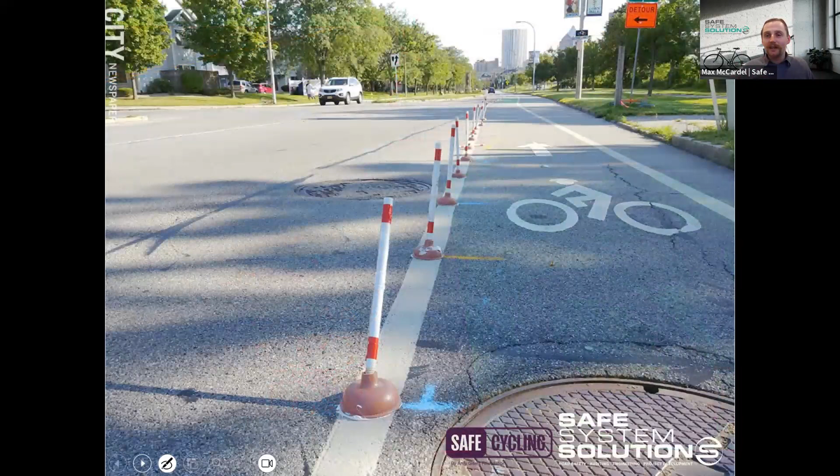This one's one of my favorites, where an individual in New York kept writing to their local government, really wanting to get protected bicycle lanes on this particular section of road because that's where they rode to work every day, and kept getting the no, we can't do it. So this gentleman decided to go to the hardware store, purchase about 100 plungers, and glued them down onto the pavement, making his own little protected bicycle lane - pretty innovative, got to give him that. Unfortunately that did not last, and the council did rip them up. To my knowledge it is still an unprotected facility, which is a disappointing outcome. But you've got to be impressed by that vigilantism and just getting on with it and doing it yourself.

The final little campaign is one out of Scotland, run probably about 10 years ago, which is this idea of 'see cyclist, think horse.' I'd recommend you watch this one after your session today. It did get pulled from the airwaves for two reasons. One being that the cyclist in the video is not wearing a helmet - not a legal requirement within the UK, but it was deemed as not showing a good message. The other reason people got quite upset about this video was that the cyclist was not riding close enough to the curb, and as you can see, that's like a bluestone paver, so I can understand why they're trying to get away from that.

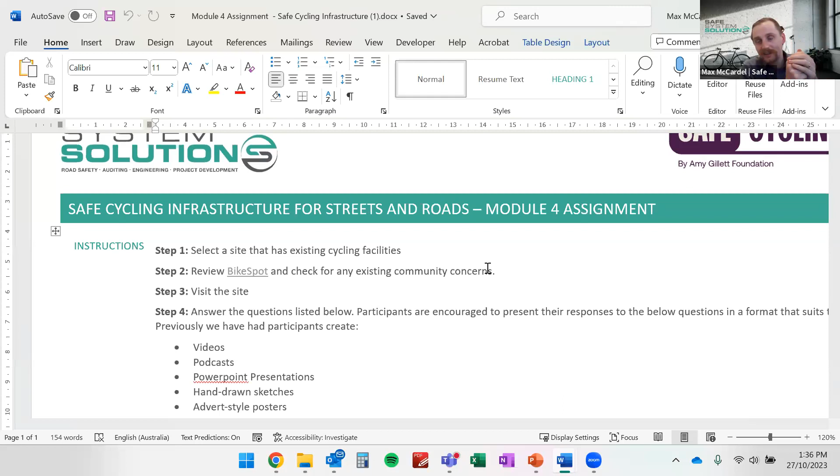Step number 3, we actually want you to visit the site. We're not making it a requirement that you cycle through the sites, not everyone has bikes and not everyone would feel comfortable riding there. But we do want you to go out there and actually visually inspect the site.

The reason being, Google Street View is only as good as however recently that was shot, and sometimes that can be many years out of date. So we recommend that you visit the site and take some photos, preferably a selfie, just so we can see that you went there, and use that as part of your assignment.

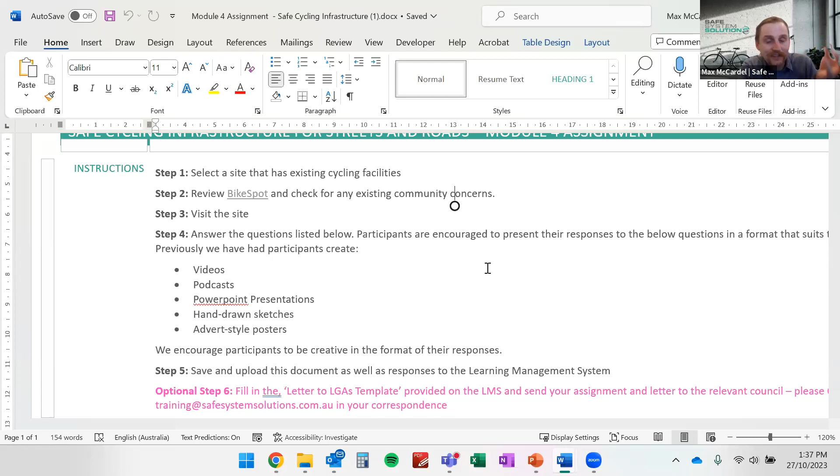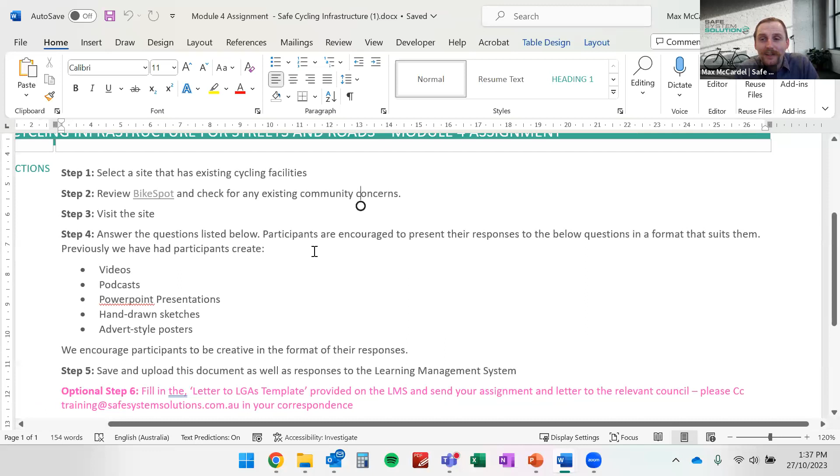Step number 4 is, once again, answering the questions that we've got listed below. The little flourish we've added here is we're encouraging everyone to respond to the questions in any form that suits you. Based on experience, a lot of the ones we get are in Word documents or PowerPoint or PDF, and that's completely fine. We've also had people get really creative, and some people have done comic book sketches.

We've had TikToks sent to us, we've had families getting involved, so you can see video footage of how it feels as a small child to ride across a particular cycling treatment and things like that. Some people just really relish the opportunity to express their creativity, so this is just a platform for that. You don't get marked on your creativity, so don't be stressed by it. You can use any form that suits you, video, a podcast, PowerPoint, hand-drawn sketches, posters, brochures.

We've had a lot, we've had a poem, we had a rap like a song that was made. It's also just entertaining for us as markers, because as you could appreciate, if you're going through hundreds of these assignments, it's nice to have a little bit of diversity.

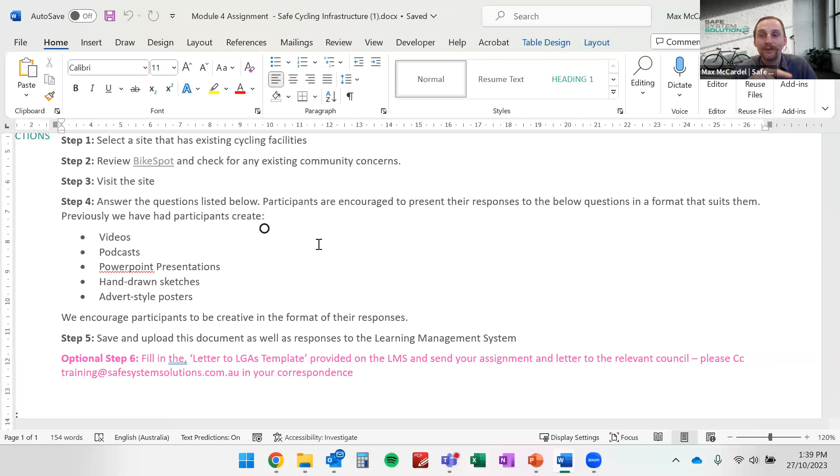But you do whatever suits you, and we'll only be marking on the way that you have responded to the questions. So the question you are required to answer is, what infrastructure currently exists? Once again, you'll be marked on your jargon or terminology, which needs to be consistent with what we've been teaching, and to demonstrate that you have an understanding of what the industry would use to refer to these things.

What are the hazards for cyclists? You can be quite broad and talk about a whole raft of things, or you can be very specific about a particular risk. That's up to you. We also look at which site you've picked. So if you picked a roundabout and the only risk you noted was a bit of leaves in the gutter, we might say there's probably some other risks you should be noting there. Keep that in mind—we want to see the most relevant risks to cyclists, the things that present the highest risk for them.

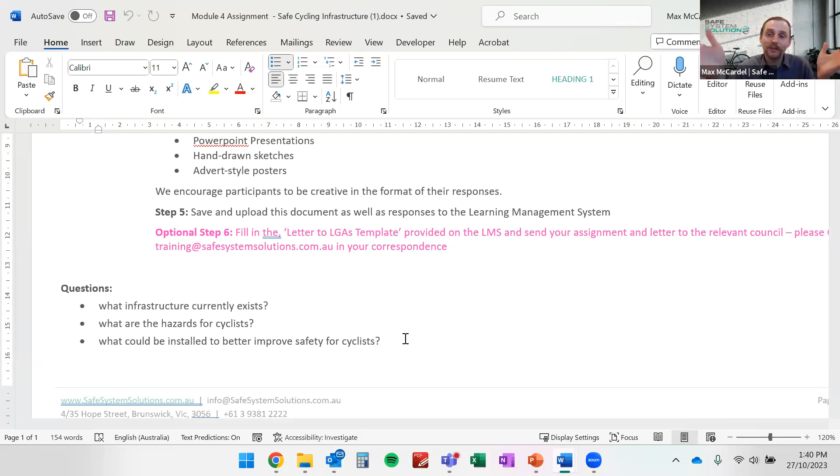The final question is, what could be installed to better improve safety for cyclists? This is where we've basically given you a blank check, and said go on and suggest a design that would improve safety for cyclists. But we do also want pragmatic solutions. So if your solution is to close down a motorway and put a bike path on it, removing all conflict points, theoretically yes you're correct, but we want solutions that could feasibly be constructed. Keep that in mind.

So those are the things you'll be marked on: how well you're articulating the hazards, whether you're using the correct terminology, and whether the safety measures you've identified are actually going to improve things for cyclists, and how likely that is to happen.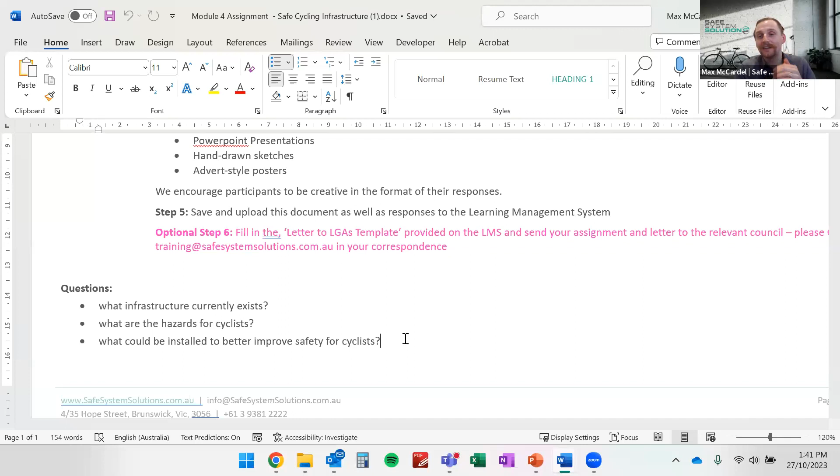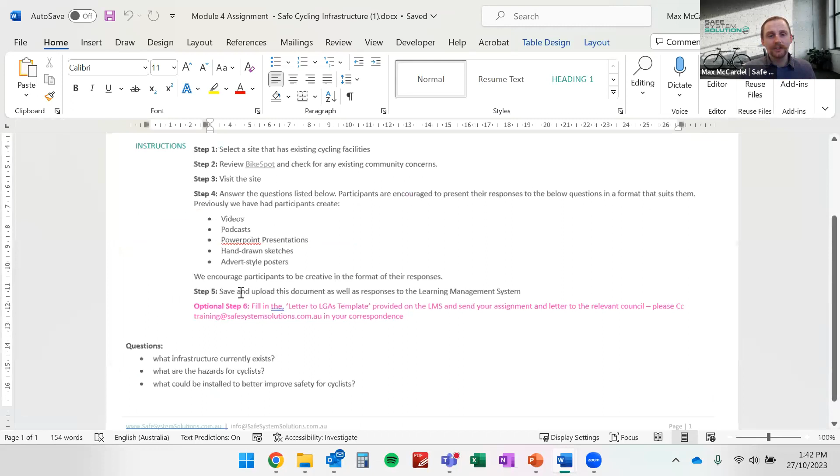Once you've done all that, in whichever format you've got, save and upload the document, as well as any of the responses to the LMS. Actually, we don't need this document saved anymore—I apologize. You can just save whatever file you need and upload that to the LMS.

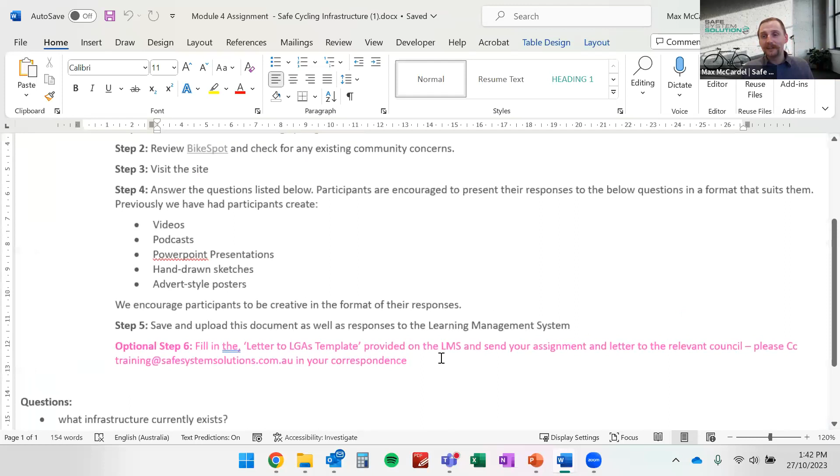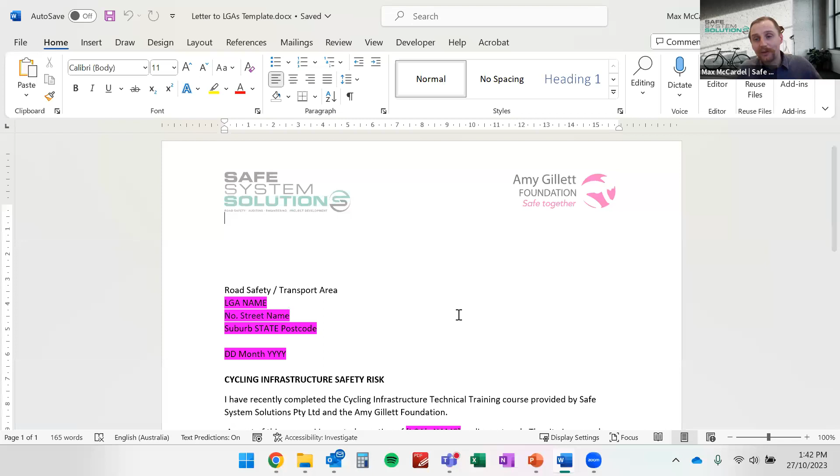There is this optional step as well, which is rather than just letting this little research assignment sit here, if you want to offer it to others who could potentially act on it, by all means we encourage that. We've drafted a letter you could submit to your local member or your local road authority, local government authority, or state authority—whatever it is. You could fill this in and send it off to them. You'd need to look up who maintains or looks after this road.

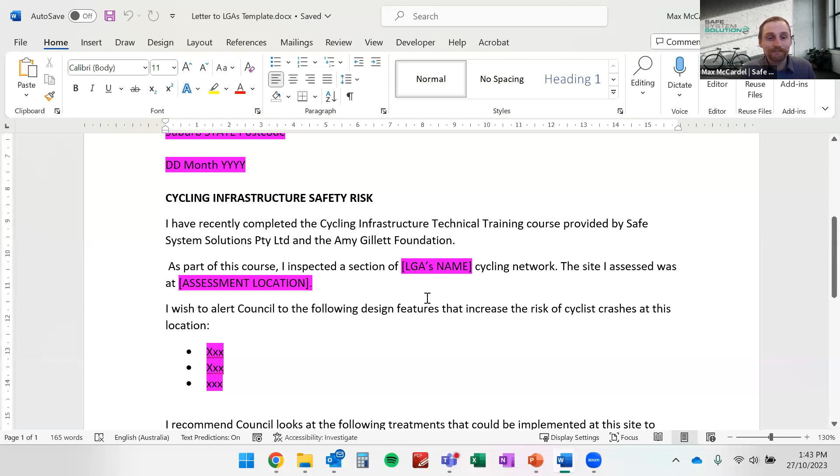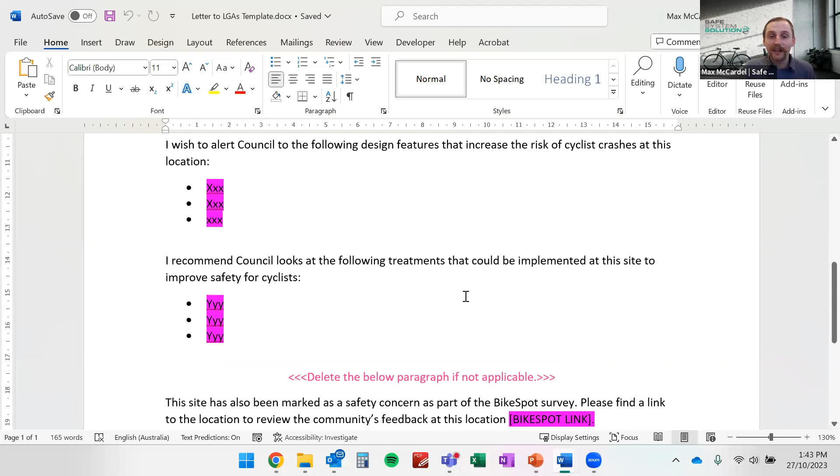It says: I've recently completed the cycling infrastructure technical training course provided by Safe System Solutions and the Amy Gillett Foundation. As part of this course, I inspected a section of your cycling network. You'll need to fill in the pink sections. The site I assessed was at [location]. I wish to alert council to the following design features that increase the risk of cyclist crashes at this location—you can dot point those. I recommend council look at the following treatments to improve safety for cyclists.

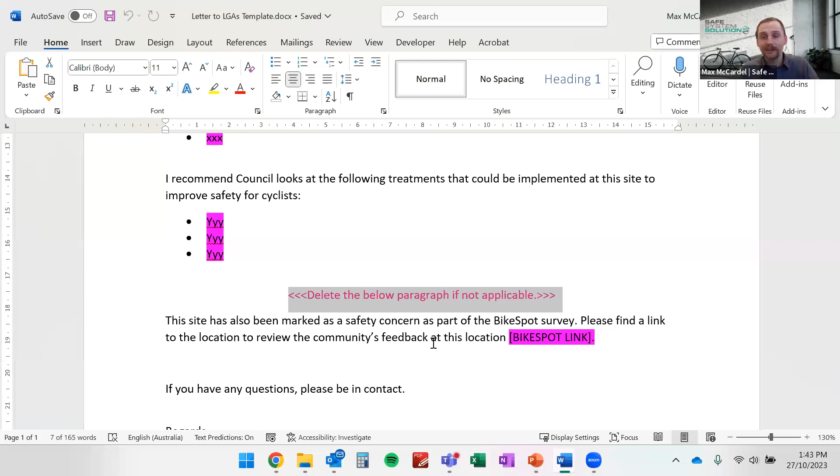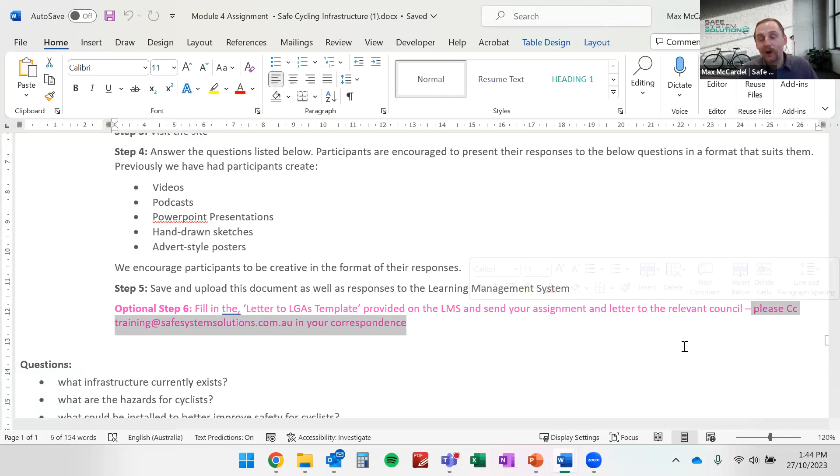You can delete the paragraph below if it's not applicable, but you could also include a link to the BikeSpot survey with any community feedback. If there's been no feedback, just delete that altogether and sign off on it. If you do want to send this off, we've just asked you to please CC the training team, so we've got a record of who's going out there. We've had a few participants in the past adopt this approach, but you are not marked on it—it's an optional activity, so it's your choice.

That is the assignment. I'll double check that I didn't miss anything there with Marissa and Catherine. And there's just one more thing I wanted to show on the LMS.

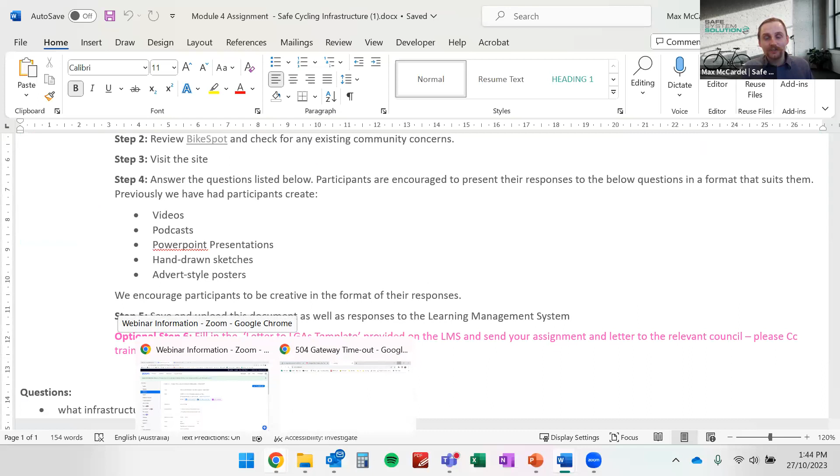No, that's all good over here. That's good, my BikeSpot timed out. I've just got a question.

Would you consider a cycling route which is nominated by council as one but has no dedicated facilities a suitable option? I think if there's nothing there, I wouldn't be doing that, because the first question you'll get marked on is what are the existing facilities. And if you said none, I'd rather see something that has been implemented already, just so we can make sure you're using the correct phrase there.

Last thing I wanted to show, and then I'll answer any more questions, is within the LMS, under resources, under reference documents and resources, we have provided this PDF of cycling 360 footage examples. If you click on that and open it up, it's a PDF which you could refer to as a library of different cycling infrastructure.

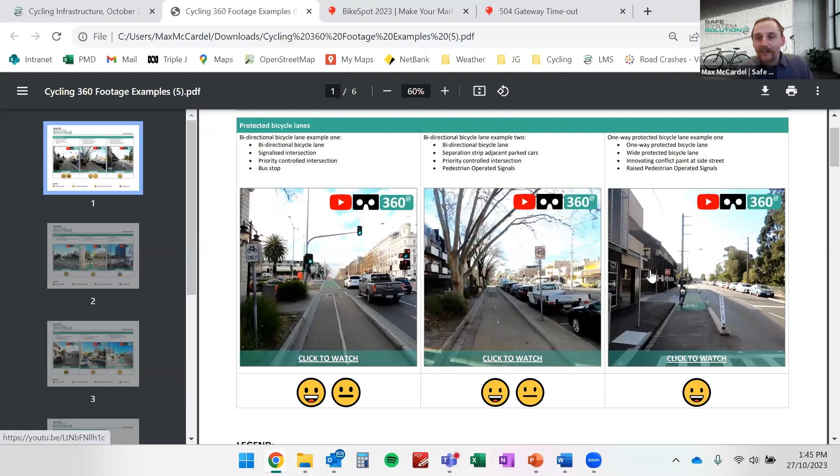So in case down the track you need to remember what is a bidirectional facility or what is a one-way protected bicycle lane, you can click on these and it'll take you to a YouTube video of 360-degree footage of actually cycling through there. We just want to make this available for all our participants, so as you go on to design and deliver improved cycling infrastructure, you've got this as a bit of a resource there.

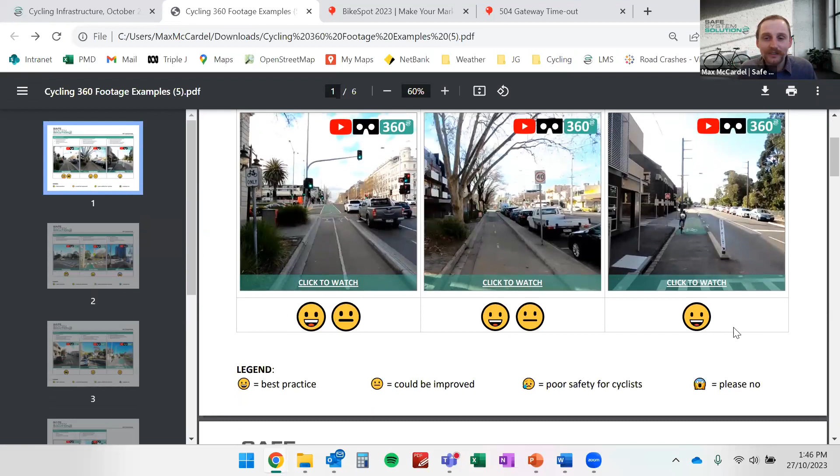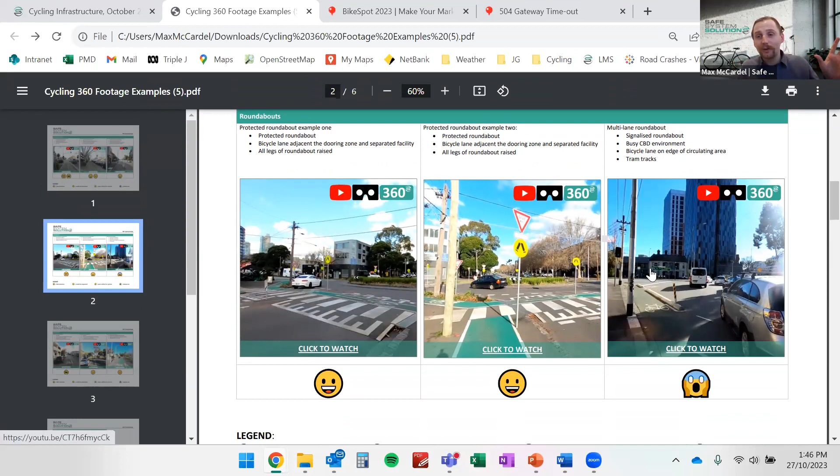We also included this little legend to say things we do like and don't like using emojis. The 'please no' ones are worth a watch anyway, because you can see why these are so precarious, like multi-lane roundabouts and stuff like that. So by all means, download that, save a local copy, and you can use that for the future.

Once all your coursework has been completed and everything's been graded, go right down to the bottom of your LMS. There's a short feedback form so you're able to give your experiences on the course. We really want to make this as engaging and content-appropriate as possible, so we strongly encourage you to put down your honest feedback there. You do actually need to complete it in order to get your certificate.

So it will be a grayed out section of your Safe Cycling Infrastructure Certificate until all the coursework is done and that feedback form is done as well.

And the final thing I'll say is if you wanted to share your certificate through social media or LinkedIn or whatever, you can share your achievement online. We have created some words you can copy and paste into your post, as well as some banners or badges you can upload, just to indicate the competencies you've achieved by going through this course. So I do hope I've covered everything.

As I said, there was a lot of detail there, so apologies if any of that was missed. Just send an email to the training team or myself, and we'll look after it. We've loved having all this participation, and it's great to see so many people asking questions. It's genuinely been the highest level of questions I've had in a cohort, which is really positive. It's kept me on my toes.